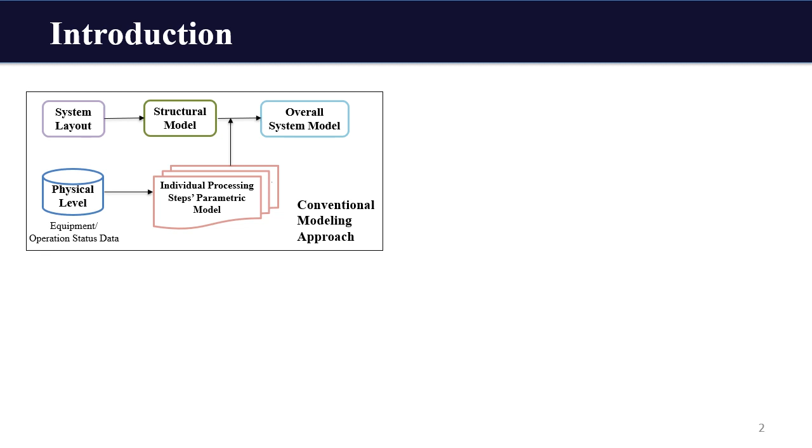The conventional approach to determine the parametric system model is to collect status data from each individual workstation and extract the model parameters by aggregating that data. There are many limitations, especially for small and medium-sized manufacturers.

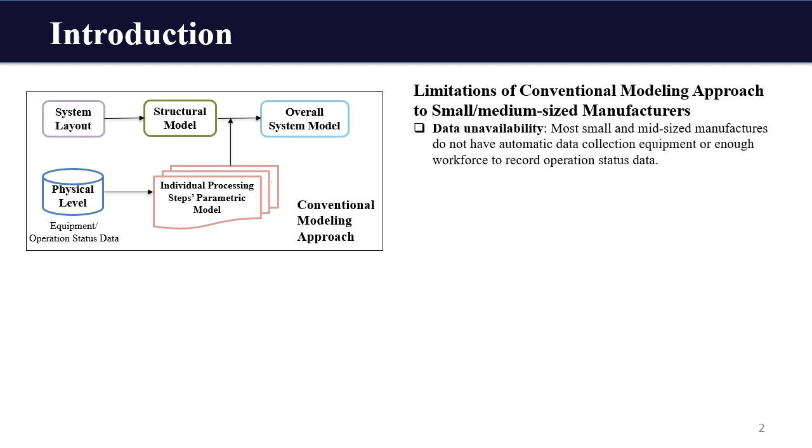First, most small and medium-sized manufacturers do not have automatic data collection equipment or enough workforce to record operation status data. Second, data from different equipment are in non-standard forms, so there is no standardized or unique solution to analyze that data and extract the model parameters. Moreover, due to different sources of noise in an industrial environment, inconvenient data cleaning work is involved.

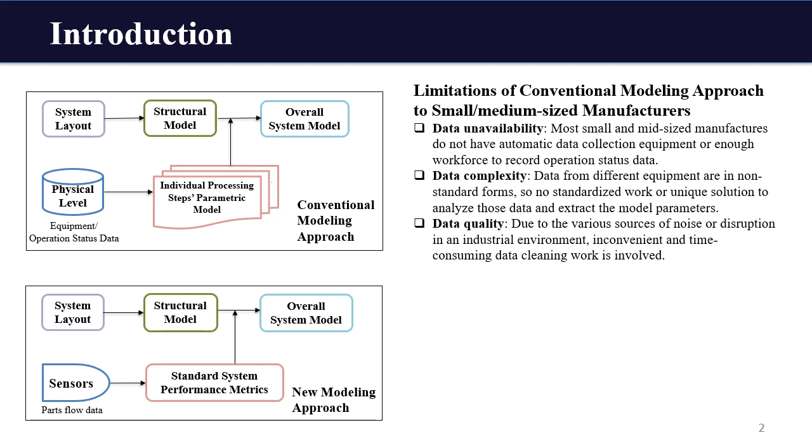Therefore, a new modeling approach is developed and applied, in which the model parameters are identified based on standard system performance metrics derived from parts flow data instead of the non-standard operation data. On the factory floor, parts flow data are much easier to collect using sensors and low noise exists.

These performance metrics are consistently defined and can be computed in standard ways. Thus, users at different knowledge levels can easily handle it.

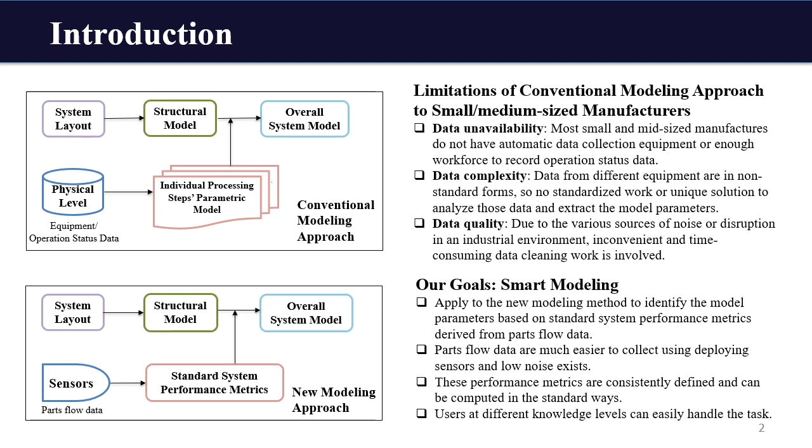In each parallel line of work cell 1, there are three consecutive operations. The parts processed from work cell 1 are then placed on a buffer to move to work cell 2, in which there are two consecutive operations in each parallel line. In this production system, the operations have different processing times, so we call it an asynchronous system.

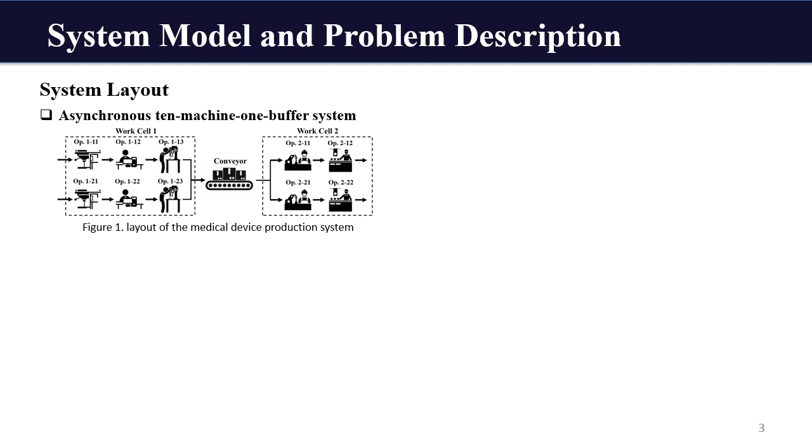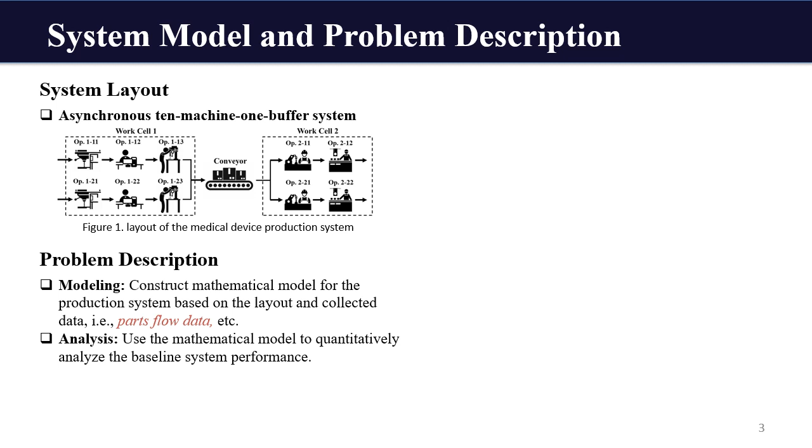In this case study, we first construct a mathematical model for the production system based on the layout and collected parts flow data. Then we use the mathematical model to analyze the baseline performance. Finally, based on the system model and the baseline analysis, we investigate improvement actions to enhance the system performance.

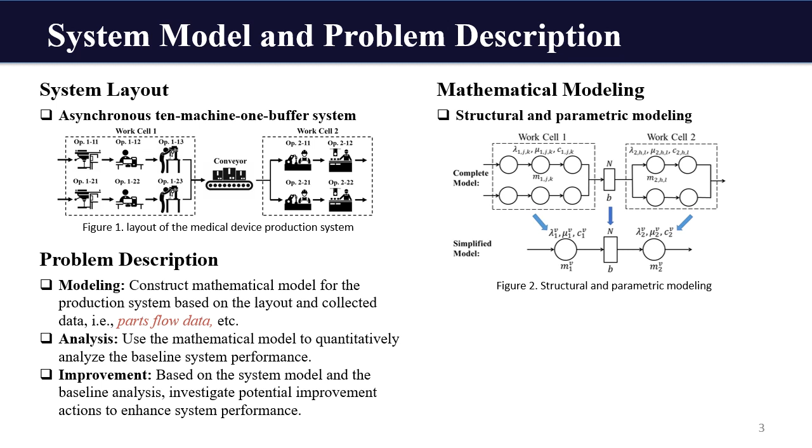First, we do the structural and parametric modeling. Based on the system layout, we built the complete model as Figure 2. Since no buffers exist inside the work cells, the operators in the same work cell are expected to work synchronously. Then we further aggregate the operations in each work cell to reach the simplified model.

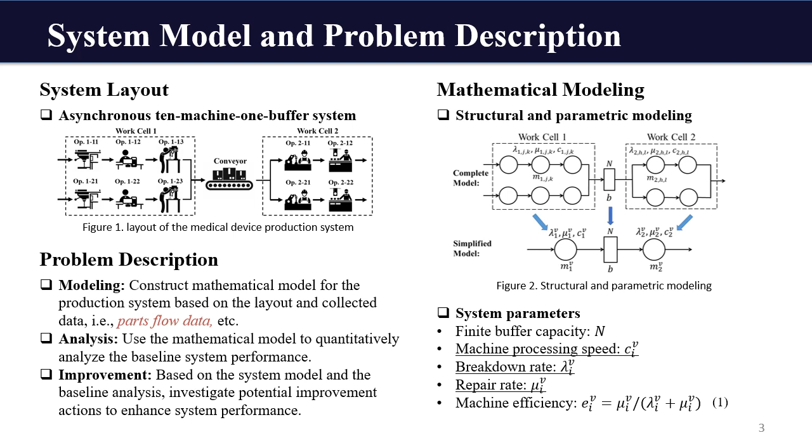For the system parameters, we assume the buffer capacity is known because it is easy to collect on the factory floor. And we assume the machines have exponential reliability, so the parameters we want to identify include processing speed, breakdown rate, repair rate, and machine efficiency of the aggregated machine in the simplified model.

For mathematical modeling, we first review the data collected. We measure the buffer capacity as 15. The reliability parameters of each operation were not available due to the challenges discussed in the introduction. The average cycle time of each operation is given as data 2.

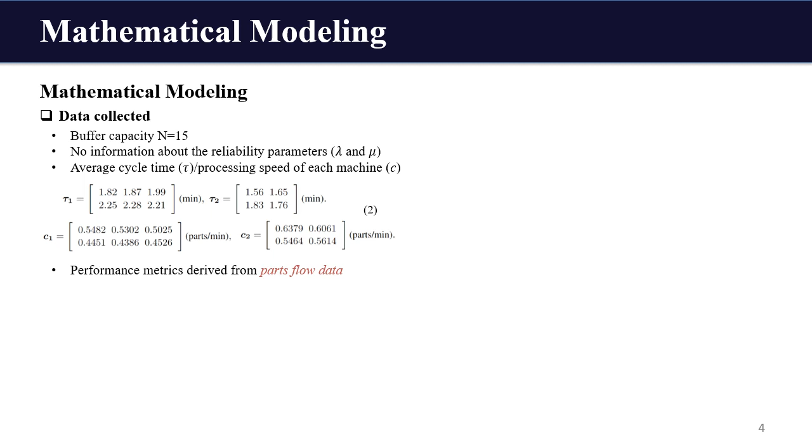And using the parts flow data, we can obtain the performance metrics as result 3, where these performance metrics are defined as follows.

Throughput is the average number of parts produced by work cell 2 per time unit during steady state. Work-in-process is the average number of parts contained in the buffer during steady state. And P0 is the probability that the buffer is empty, and Pn is the probability that the buffer is full.

With the data collected, the next step is parameter identification. Since we know the processing speed of each operation, the aggregated processing speed can be obtained as formula 4.

Then, to obtain the aggregated machine reliability parameters, we solve the constrained optimization problem 5 to minimize the two-norm error. That means we want to find the machine parameters that best match the performance metrics based on the analytical expression of these performance metrics in the two-machine line model.

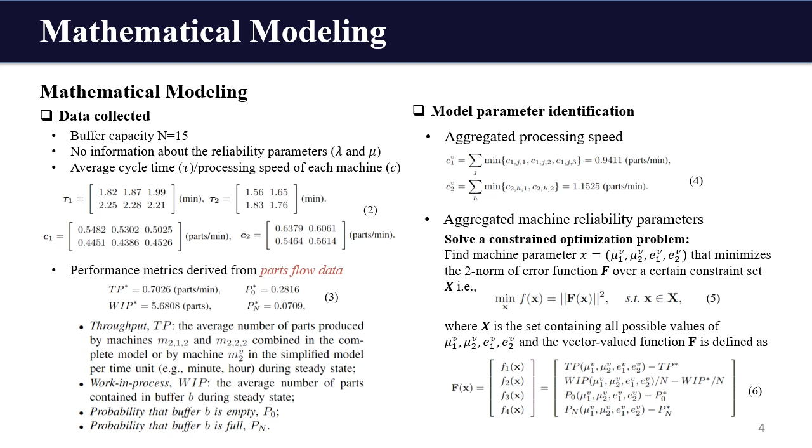To solve this optimization problem, we developed a multi-start modified projected Quasi-Newton method. Given a set of performance metrics as input, we randomly select initial points from the constraint set and initialize the gradient scaling matrix. With each initial point, we update the solution by steps in a while loop.

First, we find the appropriate step size for the projection arc using the Armijo rule. Then we compute the projection arc and compute the feasible direction, and then we update the solution.

Then we separate the variables into two groups, restricted set and free set, as defined in Formula 10. The Quasi-Newton type gradient scaling only applies to the free variables, and the restricted variables descend along the gradient direction.

After updating the gradient scaling matrix, we come back to check the convergency. If it is converged, we output the solution as a candidate and move to another different random initial point and repeat this algorithm to get another candidate. Finally, the optimal solution is one of the n candidates who leads to the minimum of the objective function.

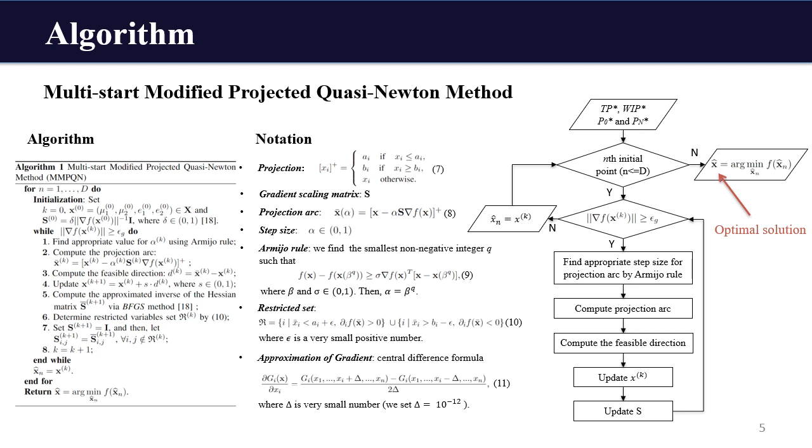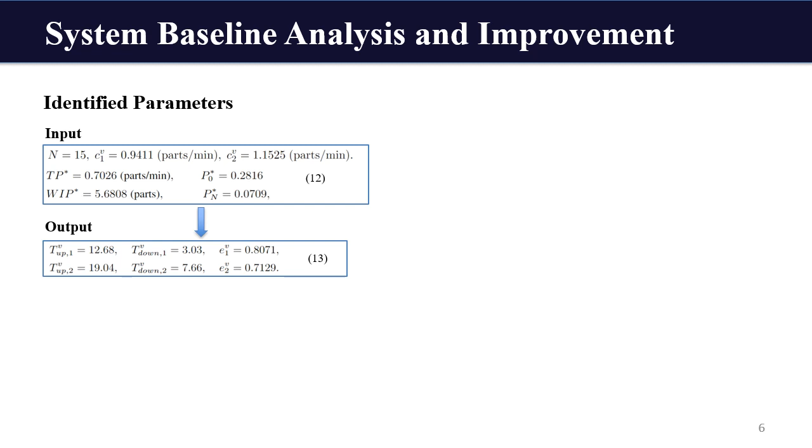In this case study, we have data 12 as input. Using the algorithm we developed, we obtained result 13. To evaluate the identified parameters, we compute the estimation error of performance metrics resulted from the identified parameters, and we get errors that are very low, which means the identified parameters can fit the system very well.

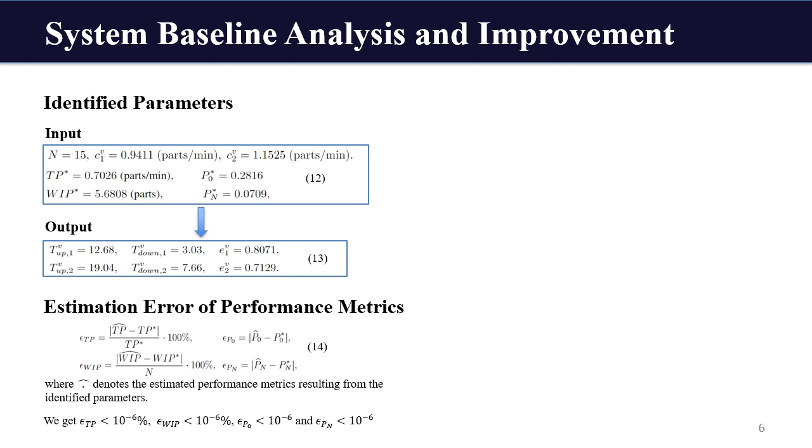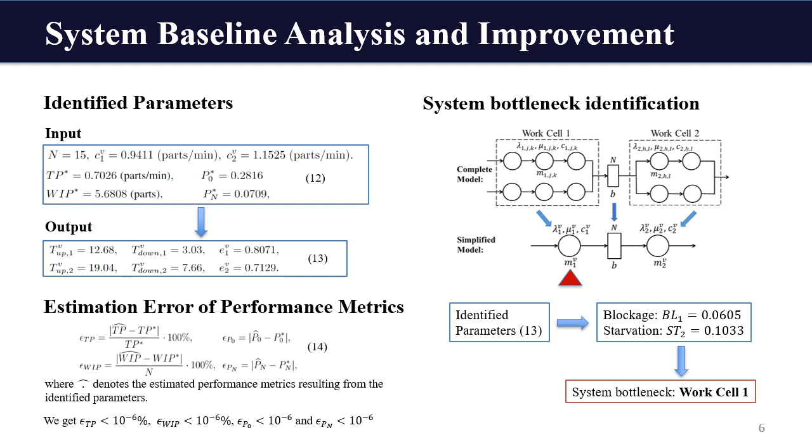Next, we want to identify the system bottleneck. With the identified model parameters, we can get the blockage of work cell 1 and the starvation of work cell 2 using the two machine line model. Therefore, we get work cell 1 is the system bottleneck.

Next, we discuss the improvement of system throughput. The first way to increase the throughput is increasing machine processing speed. Since work cell 1 is the bottleneck, we prefer to increase the operation speed of work cell 1.

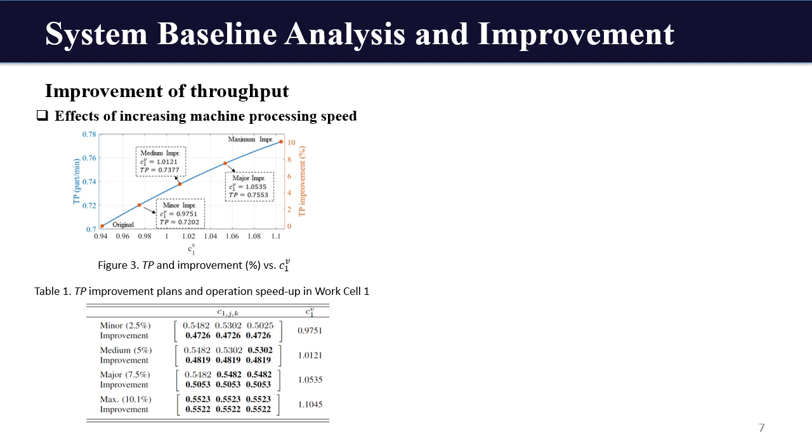Figure 3 shows the effect of increasing aggregated speed on the throughput, and we find the corresponding points of our defined minor, medium, major, and maximum improvement. Table 1 is showing the detailed improvement plans and operation speed up in Work Cell 1.

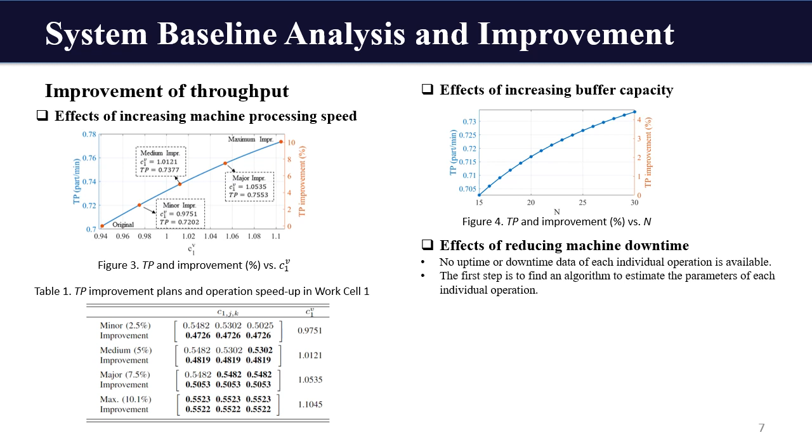Since no uptime or downtime data of each individual operation is available, to study the effect of each downtime change, the first step is to find an algorithm to estimate the parameters of each individual operation. So we assume each parallel line in a work cell has identical aggregated downtime and stand-alone throughput, and the consecutive operation in the same line have identical downtime and standalone throughput.

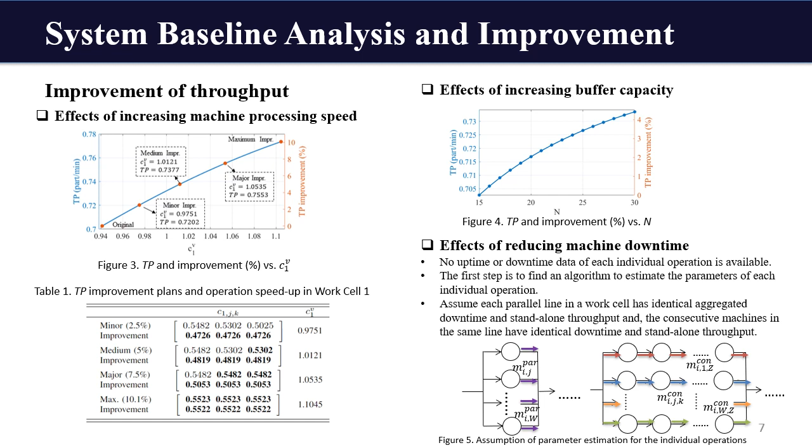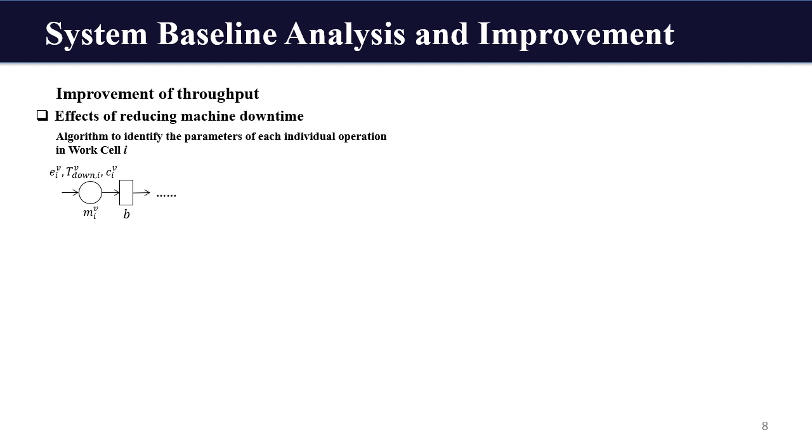We can first get the estimated E, T down, and C of each parallel line using formula 15, and then compute the E and the T down of each consecutive machine using formula 16 as the estimated parameter of each individual operation. The identified parameters are shown as result 17.

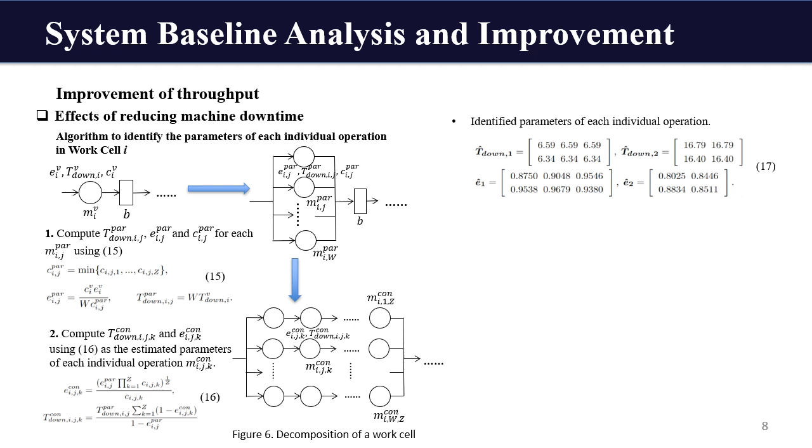Due to the parallel structure in both workcells, we reduce the downtime of the operation carrying on the same processing work at the same time. For instance, we reduce the downtime of operation 111 and 121 together.

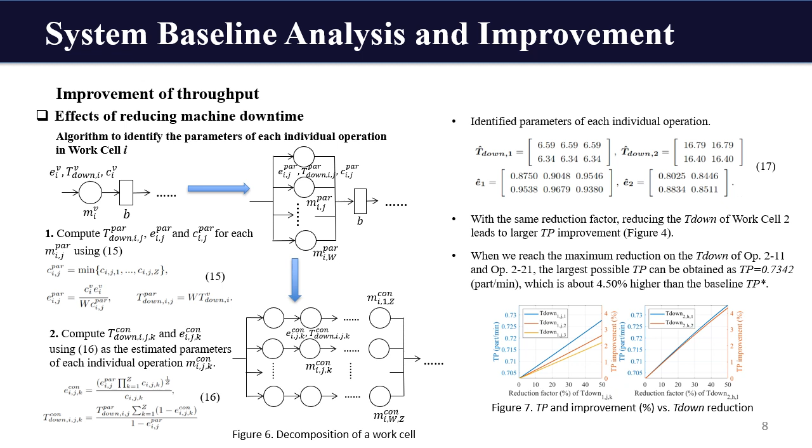With the same reduction factor, reducing the downtime of cell 2 leads to the larger throughput improvement as shown in Figure 7, and the maximum possible throughput we can get is about 4.5% higher than the baseline.

Finally, we do the model sensitivity analysis. Although the parameters identified for the simplified two-machine model can perfectly fit the observed system performance metrics, it is important to show whether the model is still robust when some model parameters are changed for improvement.

We first search for a set of machine parameters that leads to the same performance metrics under the 10-machine model, which is equation 18. We call it the true system parameters. We change the processing speed, operation downtime, and buffer capacity to mimic the possible improvement scenarios.

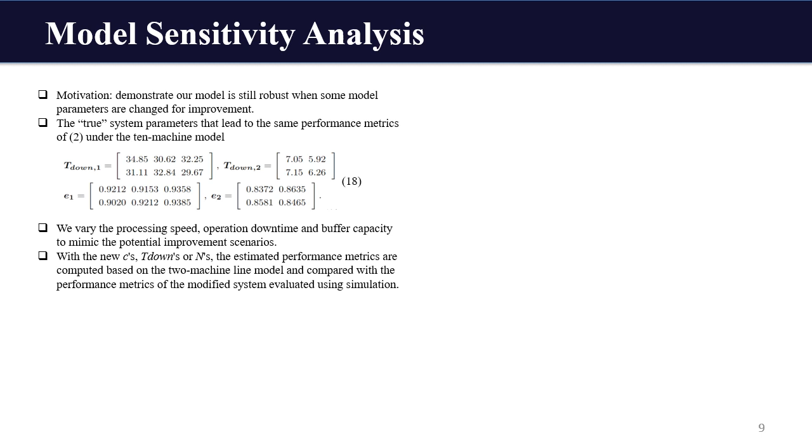With the new Cs, T downs, or Ns, the estimated performance metrics are computed based on the two machine line model and compared with the performance metrics resulted from the true parameters using simulation.

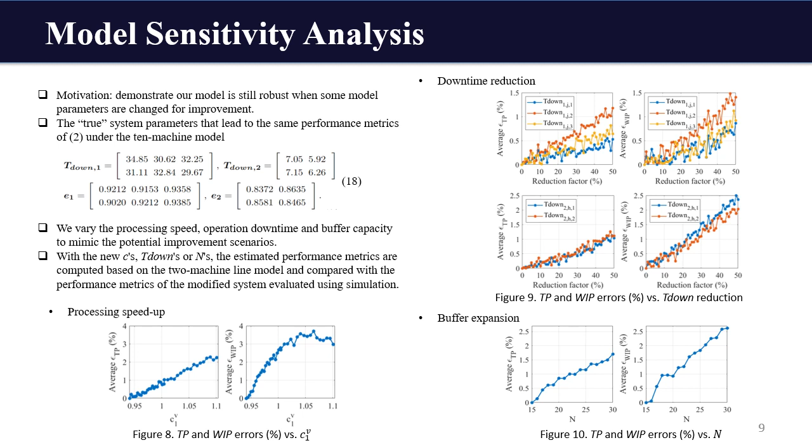In this paper, we applied a novel approach to modeling a production system in a case study at a local small manufacturer of medical devices. Specifically, we transformed the complete 10-machine system model into a simplified 2-machine asynchronous exponential line model.

The model parameters are identified using a multi-start modified projected Quasi-Newton method to match the given performance metrics derived from the collected part flow data. With the identified model parameters, we analyze the baseline performance and develop improvement actions, including operation speed up, downtime reduction, and buffer expansion to enhance the throughput.

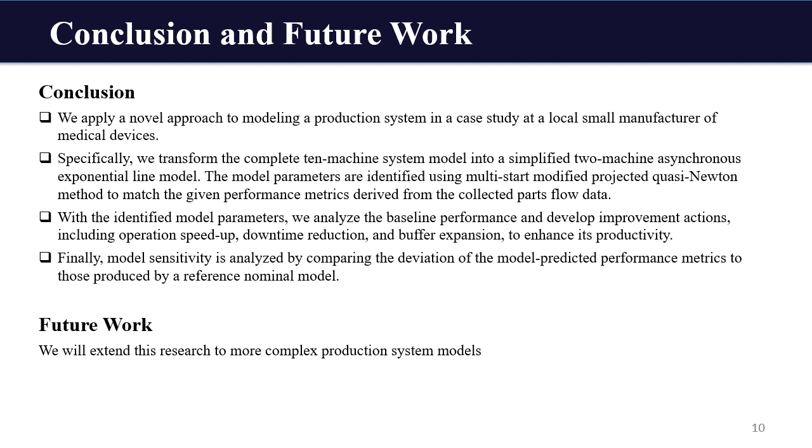Finally, the model sensitivity analysis compares the deviation of the model predicted performance metrics to those produced by a reference nominal model. In future work, we will extend this research to more complex production system models, for instance, multiple machine serial production lines, systems with non-Markovian reliability machines, and systems with assembly operations and rework loops, and so on. Thank you.